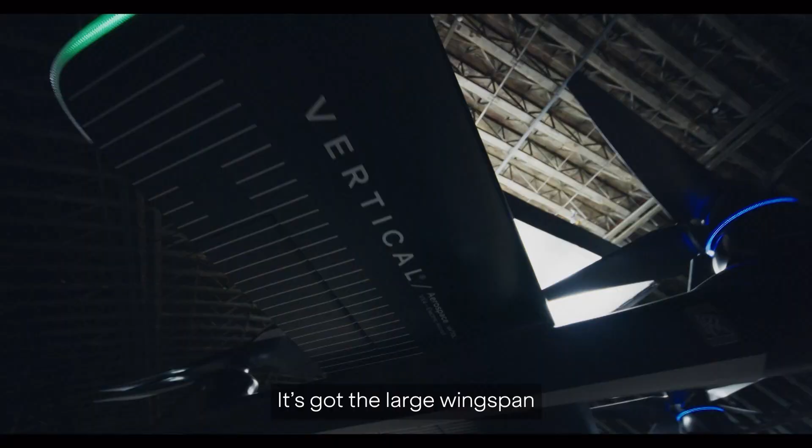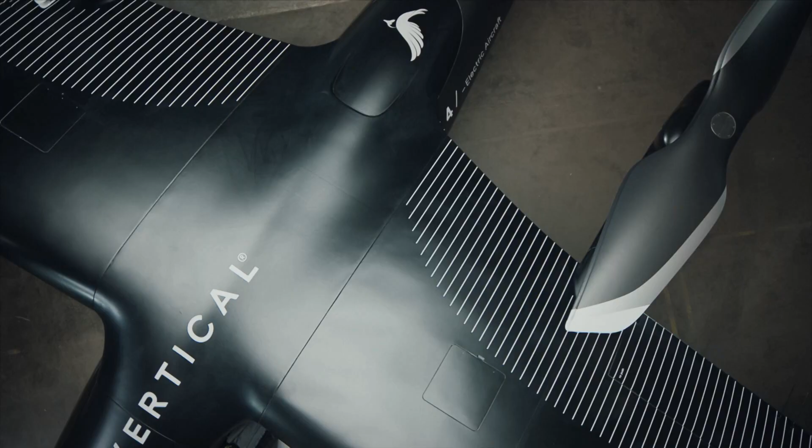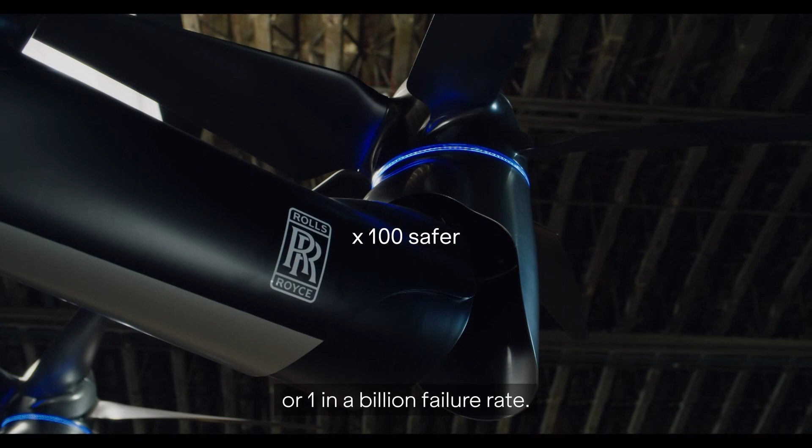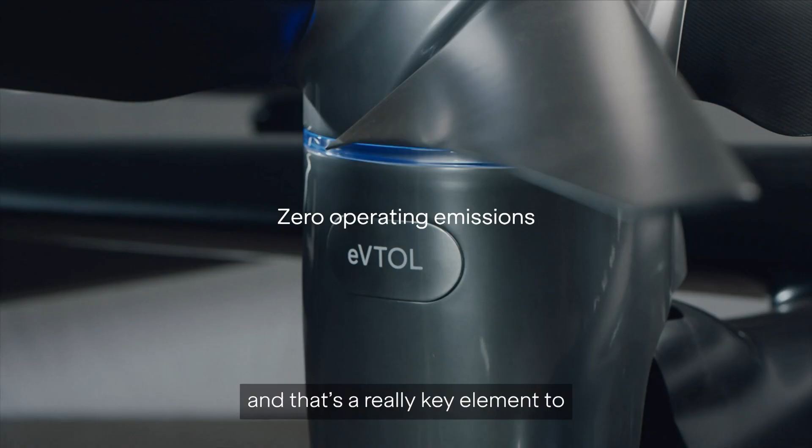A lot of people behind the scenes working very long hours. This is right at the cutting edge. I've flown a simulator of it, I've seen virtual reality mock-ups of it, but this will be the first time I've actually seen a real aircraft. It's got a large wingspan that gives it the ability to fly at 200 miles an hour. To take off and land vertically we've got 8 lift rotors and they tilt from 90 degrees, so that enables us to yaw the aircraft. We then transition towards forward flight and then it flies like a normal aircraft. We build in what's called redundancy, and that enables us to conceive an aircraft that's 100 times safer than a helicopter, or 1 in a billion failure rate. Our aircraft will be at a fifth of the operating costs, and then finally it's emissions free. That's a really key element to the whole purpose of Vertical Aerospace. This is completely new - we're pioneering electric aviation, and this is going to transform the way we travel.

Wow, impressive, thank you. Impressive also from the fact that you just started a few years ago, and I saw in the press that you already completed some certifications. So how did you get to that level of maturity?

Indeed, we had our first DOA a few weeks ago - design organization approval. It's a major milestone for an aircraft company. It's a delegation from the authority, from CAA, the UK authority in our case, that confirms our strengths, our knowledge, in order to deliver a safe aircraft and to be able to fly it with passengers. It's a key milestone that requires supporting evidence and enables us to move to the design phase and to the manufacturing of our certified aircraft.

I was really impressed because I was lucky to be at Farnborough last year, and I saw the aircraft. It was really amazing to see the size of the aircraft, and also to think about the challenges you have in making the aircraft quieter, electrified, thinking about the range, thinking about the speed. So how did you achieve all these challenges?

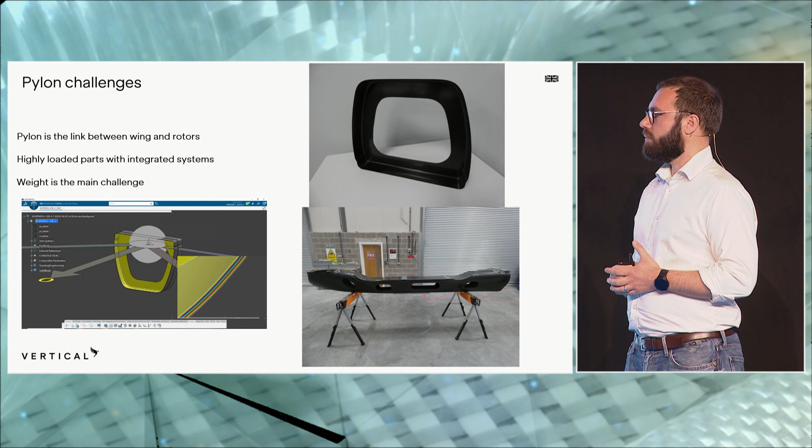By the way, Nicolas, you mentioned the collaboration with manufacturing or the partners. You are part of a team of hundreds of engineers working on the aircraft, prototype 1, prototype 2. I was wondering how you collaborate with all the stakeholders of the program.

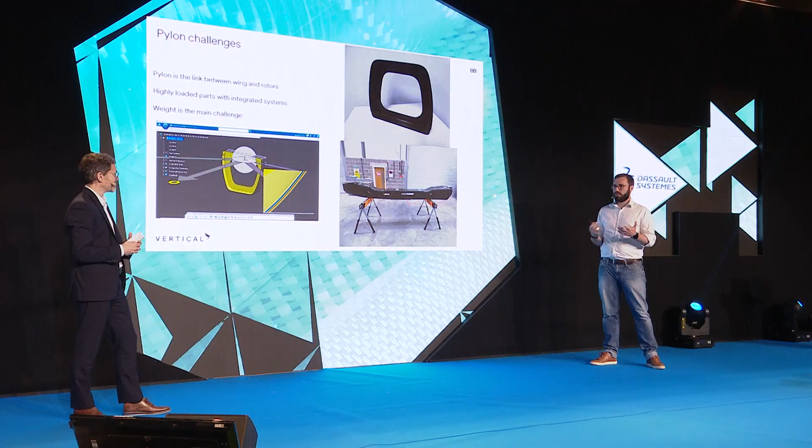Yes, so our first aircraft flew last year. That's the picture we saw on the previous slide. We did our first flight. And as you mentioned, we are moving towards our second prototype.

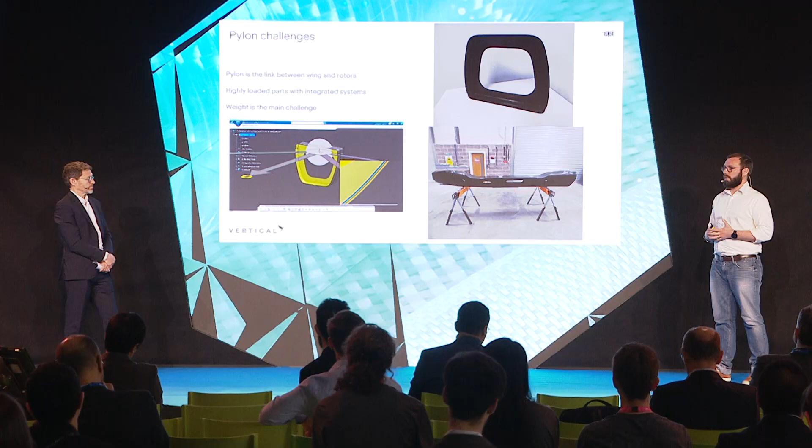This prototype is being developed with partners who have access to the entire 3DEXPERIENCE platform. They can share, and we can share with them, the latest up-to-date design solutions. They can contribute to those design solutions live on the platform. So that's really helpful to be able to use those partners. We have GKN Aerospace and Leonardo Aerospace, two very strong partners that help us in the manufacturing and support the manufacturing of the aircraft. And they can contribute to the platform too.

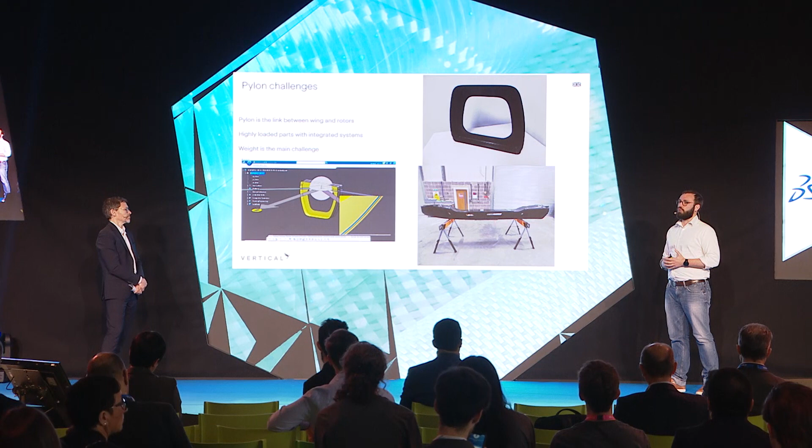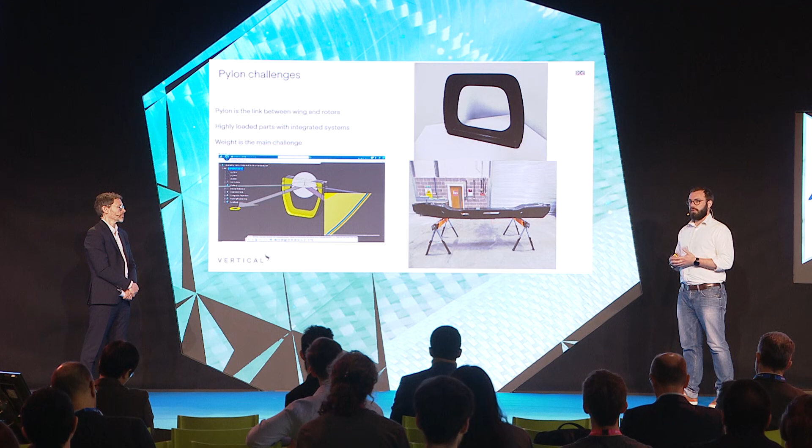We also have, of course, some suppliers. 3DEXPERIENCE is also an asset to manage the suppliers. We can share with them directly on the platform only a limited amount of information, only the parts and the information we want them to manufacture, and we manage the data thanks to the platform. So we can share and make sure it's the latest revision. There's no question anymore about whether it was the last revision, or what was manufactured. It's streamlined through the 3DEXPERIENCE platform. And that's really an asset to support the manufacturing of the second prototype.

Okay, well Nicolas, I know you've been using CATIA for many years, starting with CATIA V5, and now you talk about CATIA 3DEXPERIENCE. I was wondering about this transition, the experience you got using CATIA 3DEXPERIENCE on the cloud, and what kind of change you saw, what kind of value and benefits.

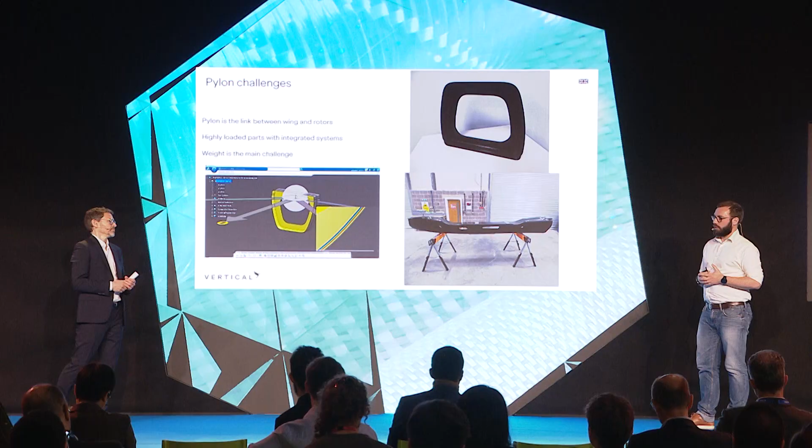Well, I saw many changes. Of course, I knew the strengths of CATIA, and then I discovered 3DEXPERIENCE in 2019. I started CATIA in 2006. But in 2019, I moved to 3DEXPERIENCE, and it was quite a pleasure to discover there is a lot in terms of traceability. We mentioned that we have our DOA, Design Organization Approval. It requires supporting evidence that the manufacturing of the composite parts is made exactly how we designed them.

If it's not exactly made how we design the part, we need to capture the difference between the manufactured part and the design. So any issue, any modification can be captured in 3DEXPERIENCE and then traced and tracked inside the platform. As soon as a part or drawing is impacted by a manufacturing request, it can be shared and captured in the platform, with a direct link between 3DEXPERIENCE and CATIA.

That's really why we talked about a twin representation, a virtual representation of the design, but also of the manufacturing. We have this end-to-end process from the early phase of the design, PDR, CDR, the preliminary phase, where we can discuss with manufacturing really quickly thanks to the tools we mentioned. And then we can move toward manufacturing.

During manufacturing, we have communication going the other way around, with manufacturing talking with us as a design office and integrating all the impacts inside the platform. So really 3DEXPERIENCE came as an extra layer on top of CATIA and brings a lot of benefit in this regard, having this twin representation, the design on one hand, the manufacturing on the other, almost merged together with communication that is streamlined in both the design phase and the manufacturing phase.

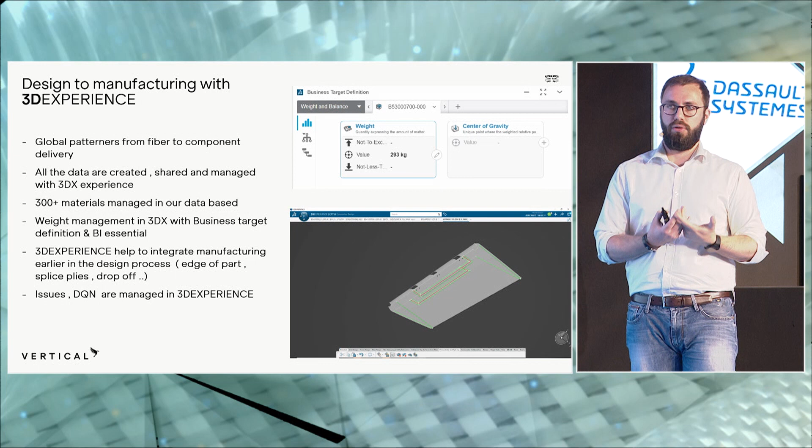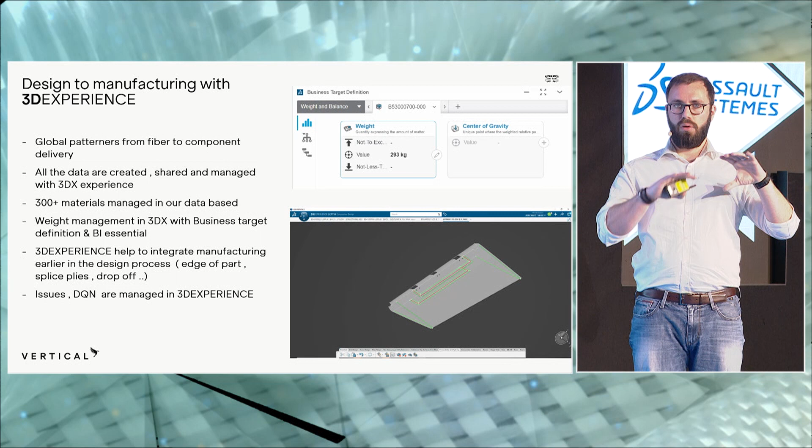We can just import the bolt from the supplier, declare a weight, and straight away in CATIA and 3DEXPERIENCE we see the weight of the work package on the spot. This is a declared weight, this is a weight computed based on material information, or if something goes wrong and the weight is missing, we can see it very quickly. That helps my life as a technical leader to check that everything is up to date.

Talking about your life as a technical leader, you told me that you work both on site at Vertical Aerospace and also from home. And there you've experienced the capacity to directly connect to our cloud platform to work anywhere, anytime.

Yes, I'm working from home three to four days a week. I'm connecting to the cloud, to the 3DEXPERIENCE platform. I have access to all the information on the platform, also all the native data in CATIA, and I can do my work as when I'm at the office. There is no difference really.

It's very efficient, and that's exactly the same experience being at work or being at home. From a 3DEXPERIENCE or CATIA point of view, it's exactly the same thing.

We talk a lot about CATIA, but what we want to do with the 3DEXPERIENCE platform at Dassault Systèmes and Composites is really to cover end-to-end solution from the very first early definition of innovative materials, new concept, preliminary design, detailed design, design to manufacturing, up to recycling of the material.

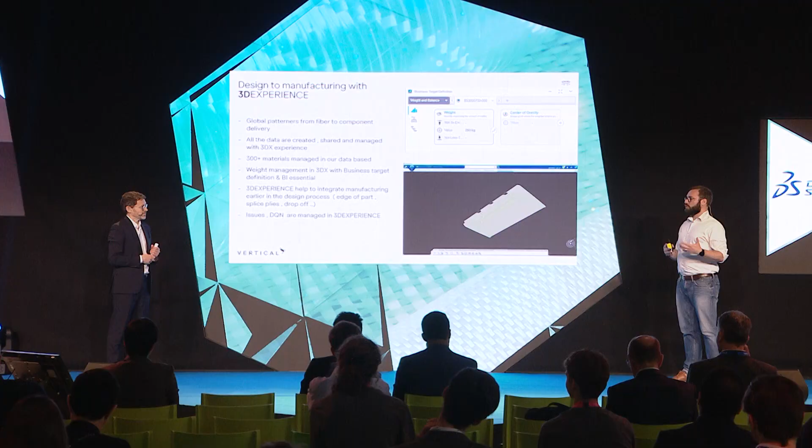This partner developed new material for us, new composite material. It can be new fiber, new resin, anything you can find about composite material. And this partner helps us to develop those materials, and we need to capture this inside the 3DEXPERIENCE platform. We can capture all the properties of the material, and then we can use it.

That allows us to have control on the database, making sure that all the designers and stress people are using the same baseline, the same material. And again, that helps develop faster solutions to design a composite part.

We have access to this database, our own database that we built with our own data, and shared, of course, with our partner. We have overall more than 300 materials, and they are all in 3DEXPERIENCE, and every designer starting a new part can pick within those materials and decide what is the best solution.

It can start with, of course, a classic layup, but it can be also a solution with foam, with a sandwich panel, any bonded solution, really any solution you can think of in composite - bonded solution, co-cured solution. Any solution can start from the material information available in the database and then be developed through the platform.

Thank you, Nicolas. I think it has been so exciting to work with Vertical Aerospace. In the past, we experienced working with companies of many sizes, but for the last 10 years, there were many new companies emerging in different sectors, like aerospace. And it's fascinating to see, starting from scratch, how you can come up with a real concept.

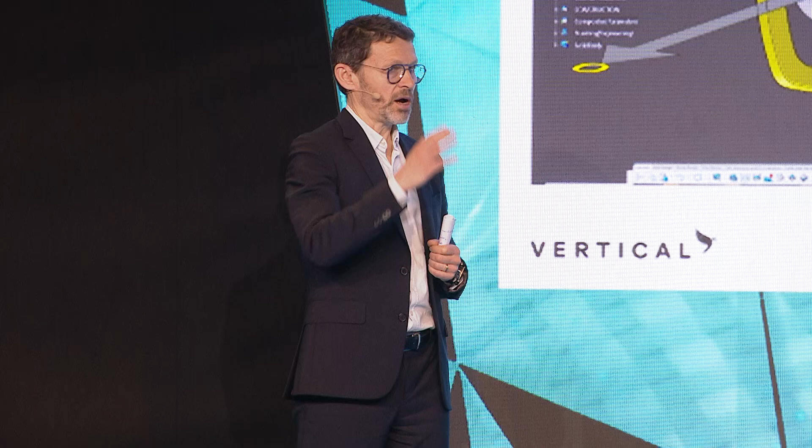Thank you very much. Thank you all.

And if we have 2 minutes and 30 seconds more, we were a bit early, so if anybody has one question, feel free.